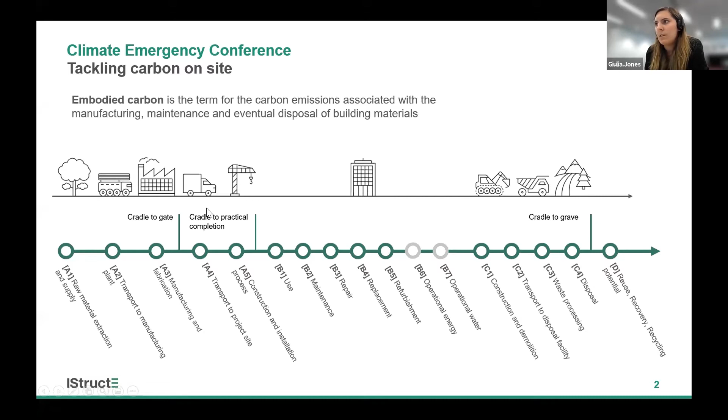And I think that's why it's really critical that we're thinking about that when we're looking at what influences and how we might go about reducing our A5 impact. So does it matter? I think so, it definitely does. How much, I've put to be confirmed, and I'll go into that question a little bit more on the next slide.

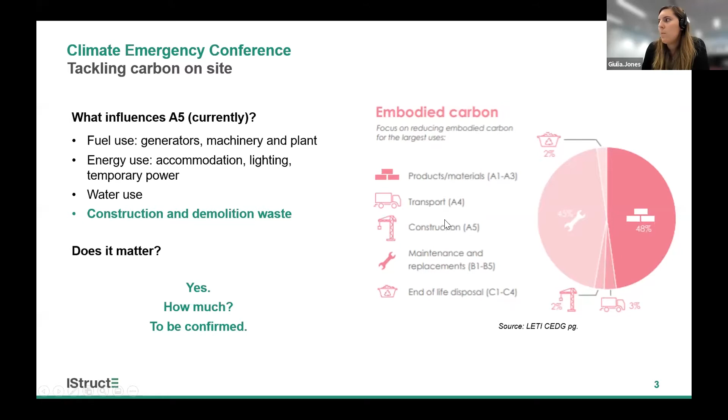But really, I guess the reason this question gets asked is that the current guidance, whether it's the LETI Climate Emergency Design Guide or the IStructE tool, have ways of estimating the impacts, and they suggest that it's between 1% and 3%, which might make us think that, given the challenges we have with the other aspects of embodied carbon, maybe it's something we don't need to really worry about just yet. But for us as MACE, it definitely is.

So from the contractor perspective, in 2019, it probably accounted for about a third of our overall corporate carbon emissions. We're a signatory of RE100, which means that any fuel that we use, any generators we use to power our sites, we have to account for, and it is factoring into us achieving that commitment that we've made or not. So definitely important to us as the contractor.

But actually, what I want to touch on is, whilst I might not quite have the scale yet, I have a sense that that percentage is potentially currently underestimating the true impacts of construction activities on our whole life carbon assessments. Over the last couple of years, we've been doing in-house embodied carbon assessment. We use the One Click LCA tool, and in the models that we're doing there, the estimates are starting to come out a little bit higher, about 5 to 10%.

Again, this will really vary on the project, but what that shows is that it's still a smaller percentage compared to that of our materials, of our A1 to A3 and potential replacement of MEP. But some of the things that I think aren't being captured entirely at the moment are the waste rates. On the IStructE guide, it suggests a waste rate for plasterboard, as an example, of about 22%.

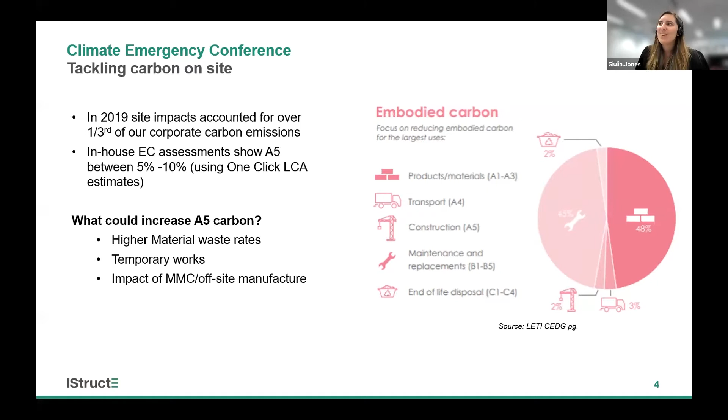So another question I wanted to touch on, and I'm conscious of time, Will, was, how do we measure it? How do we tackle the performance gap? So Optimise is a system that we use at Mace, and we actually track every single one of the metrics I talked about. So we will measure exactly the amount of fuel we use on site, how much waste we produce and the nature of that waste, the water, the energy we use, and obviously we know where we're getting that energy.

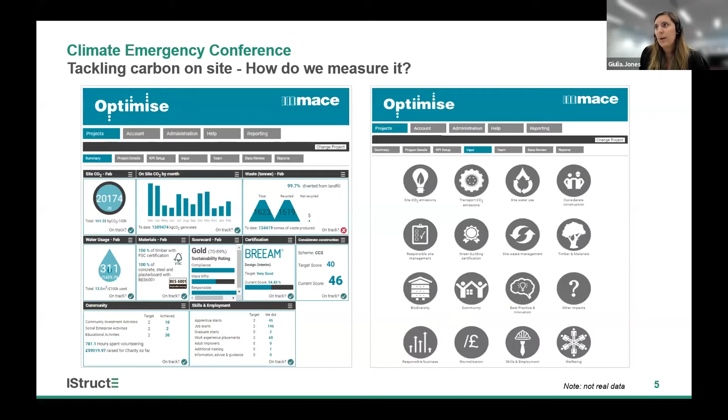So I guess what I would say as a client is, this is the level of detail that we want to be capturing on our projects so that we can start to get a much more accurate picture of what the actual A5 impacts are. So I've touched on that, but really just to wrap up, what have we done to tackle our A5 emissions? As I said, for Mace, it's a huge part of our footprint.

We've been running what we've called clean tech trials, where we've been trialing prototypes and hybrid or fully electric machinery for some time. And what this has actually meant is that we are now looking at entirely diesel-free sites where we're only using electric machinery. And we've actually got a diesel generator ban on all our projects. We're working with our supply chain. So we're actually asking all our supply chain to have a net zero carbon strategy and targets in place, and working with them to help them along that journey.

And I've mentioned that we're doing these as-built embodied carbon assessments, using the Optimise data we have to start to get a better picture of what the site impacts are for our projects. So what can you do? I think reducing the amount of materials at the design stage, I'm sure it's something that's been touched on already, is going to have a massive impact, and actually creating a design that doesn't bring about more waste during construction. But I know that can be a bit challenging.

So talk to the supply chain, bring the likes of us or specialized subcontractors in as early as you can. And make sure that you're measuring. Whether you've done a design stage embodied carbon assessment, try to make sure that that's tracked, encourage your client to get that assessment done all the way through, and then compare what you predicted to what's actually happened on site, and share your findings with everyone. And so really the main thing is watch this space. We have a lot of data at Mace, and we now are very excited.

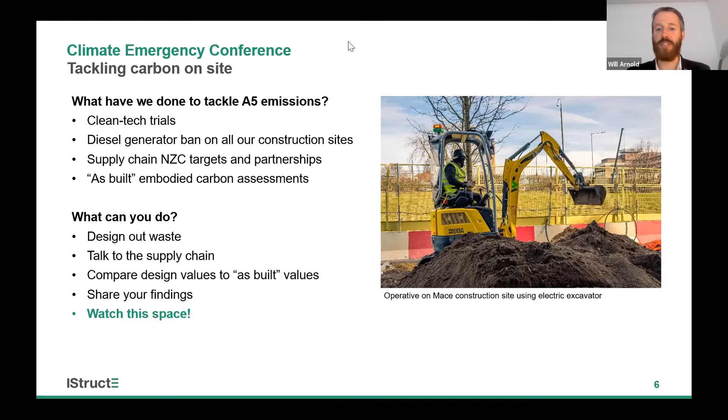So I'm now going to introduce Cameron. Cameron Archer-Jones, no relation to Giulia Jones, I don't think. Cameron's a principal engineer at COWI, which is pretty famous for their bridge design. And Cameron's involved in a few different strands of work around carbon that have cropped up over the last year. Probably the most recently, if you picked up The Structural Engineer when it landed on your doorstep yesterday, you will have seen Cameron's latest article in there. So really delighted to have him talking to us about carbon in bridges today. I think there'll be a few parallels even for those of us working in buildings, but it should be a really interesting take on a slightly different part of the structural engineering world.

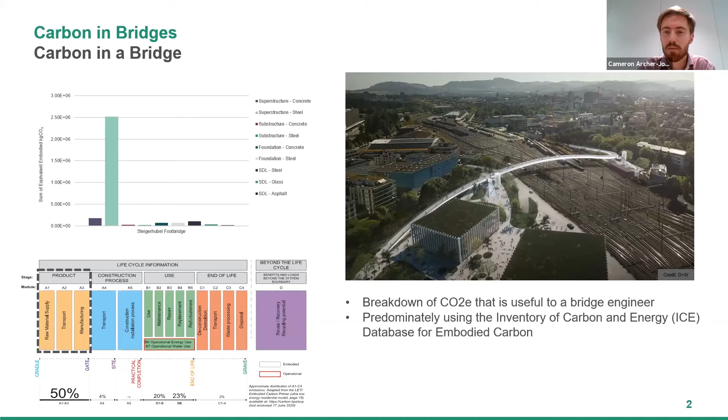But more importantly, in our approach, we wanted to package up the carbon in useful groups for the engineer. So, if we had a limited amount of time, which you typically have in a tender or a competition, where do you focus your energy to save carbon? This way of looking at the problem gave us the scope to do that. In this example, when we first started, we just started with A1 to 3, and we used predominantly the database from the Inventory of Carbon and Energy. So then we had one data point.

We then reflected internally on how we could expand this and make an internal database to understand how we were performing on our jobs collectively, with the main aim of helping us get better over time. And with that, we needed more data points. So we collected the quantity schedules that were readily available for a whole set of bridges, some of which are on the screen at the moment, and put them through the same process, but then expanded it to include A4 and A5. The details I'll touch on the slide after next.

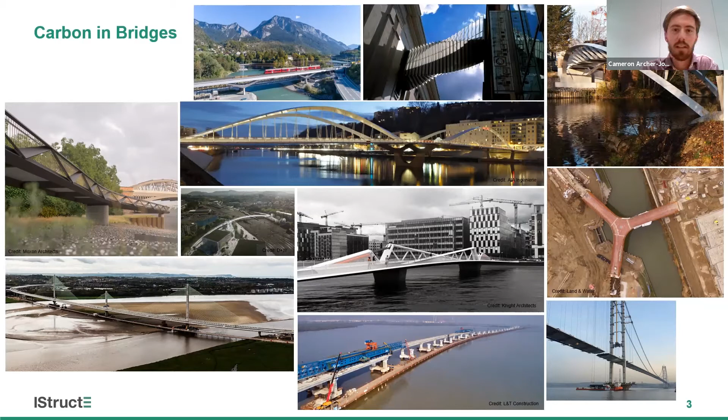And again, by tracking it through with the subsystem and component from an engineering point of view, we could quickly track through what parts of the structure were governing its carbon footprint. And also by tagging it with useful information like the span length, the ground type, things like that, we could also get a feel for what other influences on the design side influence the carbon footprint.

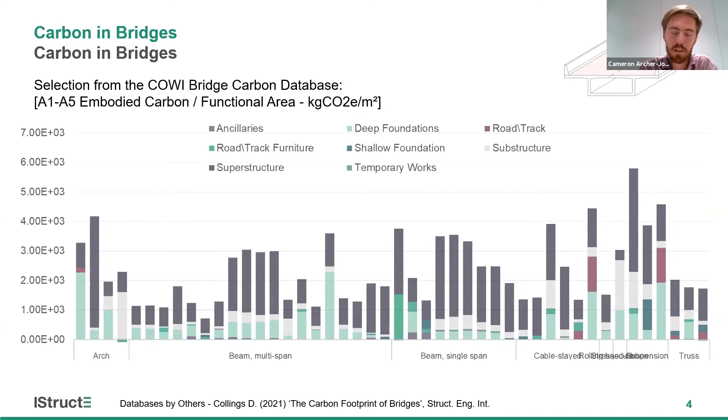I'll touch on in a couple of slides the headline results, but on the left-hand side, just to highlight, that's kilograms of carbon equivalent. So for a bridge, we're typically talking tons per meter squared. This is A1 to 5 life cycle emissions, as I say. And just one last point for anyone interested in more data in this space, there's a good paper by David Collings published earlier this year.

So what's different for a bridge when doing these sorts of calculations? I've put together a list of dot points of things that we came across when we were doing these calculations. Stepping through from the material manufacture side, you've typically got higher strength concrete, which is not directly covered in the ICE database or in the IStructE guidance, but you can do it with the proportion of cement in your concrete mix.

And what may be deemed as more traditional civil items in a bridge typically fall within our scope and get defined in our drawings and in our specifications. So the surfacing has to be included, which we've included. And earthworks, depending on if you're trying to compare a long bridge with a short bridge plus an embankment, shouldn't be ignored. If this is site-won material, it's going to be very low in terms of its material manufacture.

And then the materials for temporary works items, a key example being if you're launching girders across whatever obstacle you're trying to cross with your bridge, that launching nose could easily have 20% of the mass of the girders you're launching across. If that's then a single-use item, then that carbon should be accounted for in some way or another. And again, deferring to the IStructE guidance, there's guidance around how to allow for reuse of that temporary works.

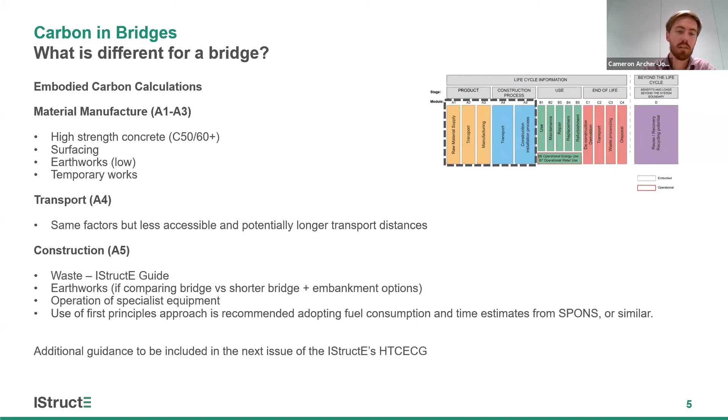And then lastly, just to note that there will be some additional guidance in the next issue of the IStructE How to Calculate Embodied Carbon guide, but with the hope that certainly by the next revision after this year's, this will be more formalized.

The other big difference for a bridge is in terms of the life cycle modules and the scope you consider. Certainly the minimum scope for a structural engineer is A1 to 5. That's the same as for a building or anything else that a structural engineer will be focused on, because that's what we have most control over. But in the context of transport infrastructure, the broader network that you're fitting into has an extra carbon influence overall if you're doing a whole life cycle assessment. And that's the carbon emissions associated with the users that use the infrastructure.

So the photo top right, all the traffic that crosses a bridge, over the lifetime of a bridge will, in some cases for a highway bridge, dwarf the capital carbon itself. So depending on the stage of the project, in a bridge context, the bridge engineer will get involved quite early. And if you're at the point of considering route options, it may well be, at least from a qualitative point of view, if you can push for a shorter route overall that has a longer bridge and therefore a higher capital carbon, considering those user-associated emissions can be important. But again, to caveat, in terms of the structural engineering side, that needs to be carefully weighted, and should involve the support of a traffic engineer or transport planner.

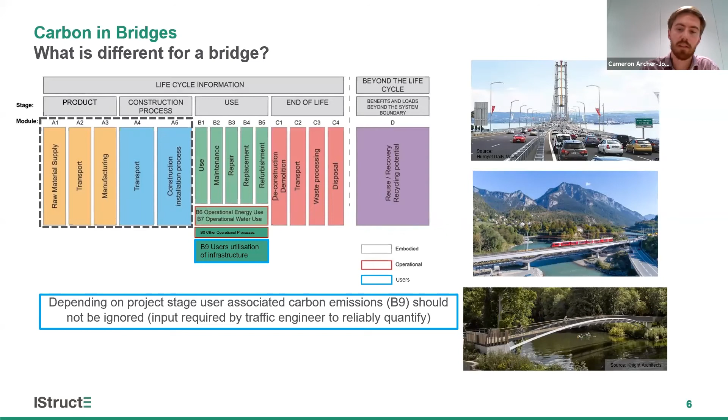Also, just one last point on this item, if your bridge encourages mode shifts away from a more carbon intensive mode of transport, that's also something that can be considered, at least from a qualitative point of view.

So from the data that we compiled, as Will mentioned, Dan and I popped all this down into a paper which is published in this month's Structural Engineer, and we had a go with the data that we had to try and propose a rating system so that any engineer looking at a bridge that didn't quite have access to data like what we were able to get our hands on can get an understanding of how they're performing with just their current project without having that background data.

So we were typically finding ranges of capital carbon between 1 to 3 tons per meter squared of deck area. It was typically governed by the material manufacture, but as I say, in comparing options, if you're looking at a shorter bridge with more embankment, the construction related emissions for hauling lots of earthworks around your site can quickly add up to something quite significant.

Overall, from the data, there was a clear link with span length, but not always the case. So one of our smallest bridges also had the same sort of carbon intensity per meter squared as one of our largest bridges. But excluding the very short spans, there was a clear dependency on span length and carbon.

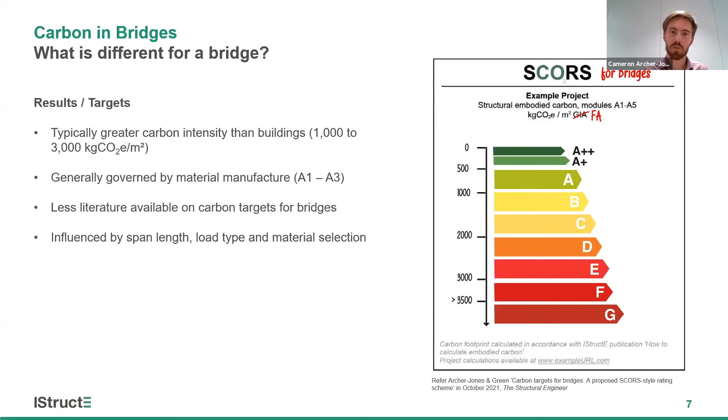So when looking at a bridge, how can we reduce our carbon? A lot of the options available to the bridge engineer overlap with buildings. But to highlight some of the things that are more exclusive from the bridge point of view, a lot of our work is focused on existing assets, bridges that were built in the past that now have more onerous traffic loads on them. And typically, a lot of that effort is revolved around finding capacity where it wasn't designed for.

So following load paths and squeezing everything out of the capacity side for an assessment is not that uncommon from a bridge point of view. But one extra step is on the load side. So something that can be done is what I've called a bridge specific assessment live load, where you use weigh in motion data to come up with a bridge specific live load and therefore reduce your applied side.

For a new bridge, I've pulled out some of the parameters that you'll think about early on when developing a concept: the functional width, again linked to the overall size and thereby reducing the carbon footprint of the bridge. Constraints around support location. So with that clear dependency on span and carbon, if you have a constraint that prevents you from putting a support in various locations, it may encourage you to go back and really challenge that and see if you can reduce span.

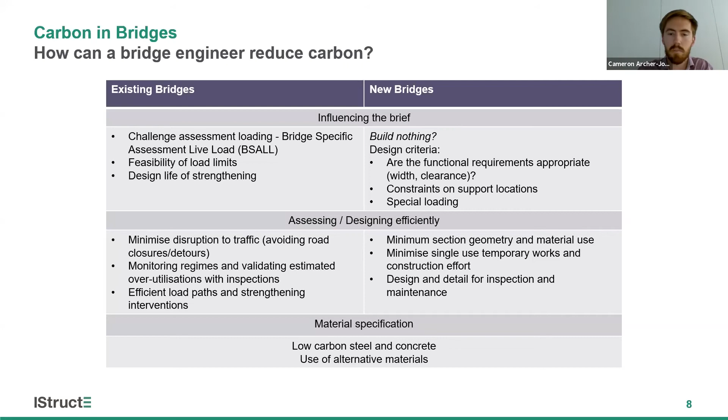And then lastly, material specifications, which has been very well covered in the previous three talks. So then just to wrap up, to bring it all back together and touch on some of the shared challenges, which are not exclusive to a bridge context, is the focus on extending the life of existing assets. That's certainly very common.

Forums like this, where we can share results, share some of the limitations on doing carbon calculations, carbon factors, and share outcomes of those examples, are obviously hugely important. And then also the materials challenge that we face. Concrete and steel, in terms of materials themselves, are so well embedded in our industry, which compared to others is quite traditional. But through collective action, we can help drive that change.

I think don't underestimate how important it is each and every time in a project, if we ask for something a bit better from a carbon point of view, you can sort of turn the ship and hold back the tide a bit. So I will end on that note.

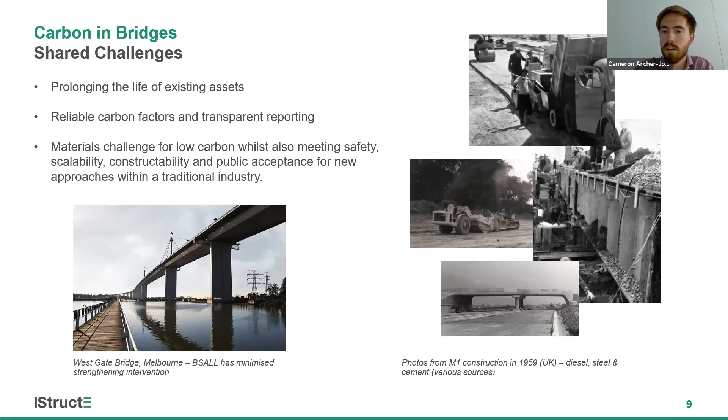Thank you very much, Cameron. I'd also add, I think there was one thing missing from that final slide, which is, you touched on the need as a bridge designer to think quite holistically in terms of user carbon as well. And I think a lot of that resonates with building designers, not always staying in your own little embodied carbon world, but make sure you peer over the parapet every now and then and ask what decisions you're making and whether they affect any of the impacts of the wider design team.

I did try and think of the most direct parallel to the users in a building context. The only thing I could think of is if you had a gym that then made all the humans in it breathe more intensely. Is that carbon? Is that carbon captured? That's the only direct example I could think of.

But certainly that holistic view is important at that early stage. Yeah, absolutely, and like you said, the earlier the better.